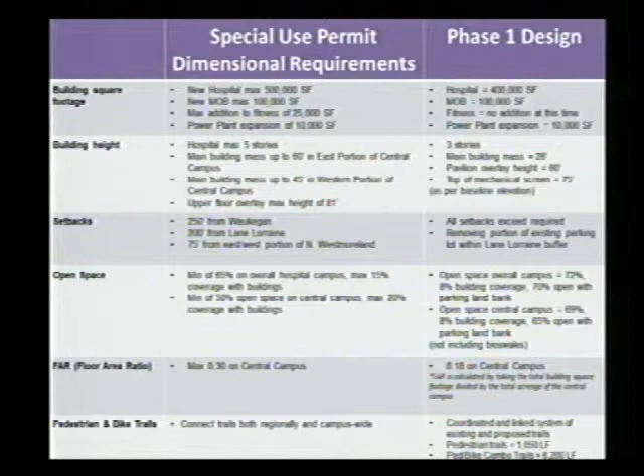Starting with the site plan, just to go through some of the basic elements once again: the building from the very beginning was meant to be a true marriage between the site and the program for Northwestern. In doing so, the building became a much lower scale, basically a 3-story building with mechanical penthouses, put into a crescent shape that engaged the necessary water elements and enhanced it by way of a reflecting pool, creating a real connective link between the south and north campuses. Parking is to the west of the structure, linked in an organic way, taking advantage of the topography, the existing roadway system, and the views to the water.

Coupled with that, we continue to respect the berms, the edge conditions of the site. We have berming along the south and the west. On the north side, there is a no-build zone of 75 feet from the southern edge of Westmoreland, as well as drumlins that occur on the west and south end of the site, which provide shielding for residents on the west and on Lane Lorraine to the south. There are also existing berms that will remain along the north side. So we're really cocooning the site to protect the neighborhoods and shield the view to the building, at least until you get into the interior portion of the site.

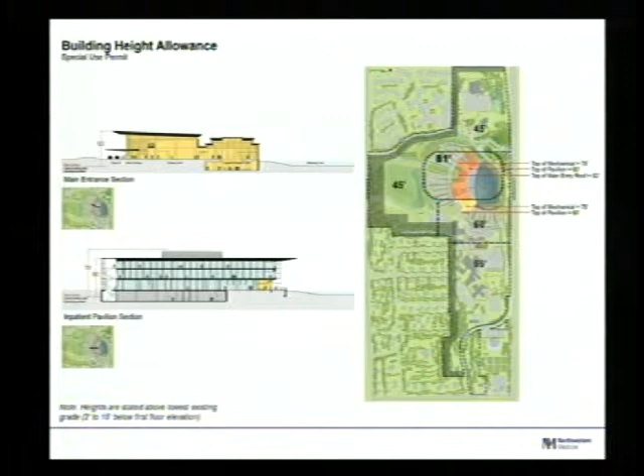As we've continued to detail the building and evolve it, we've continued to update our views of the building from various vantage points, from Green Bay, from Waukegan, and within the site. I'll show you how that has progressed as we've gotten greater detail.

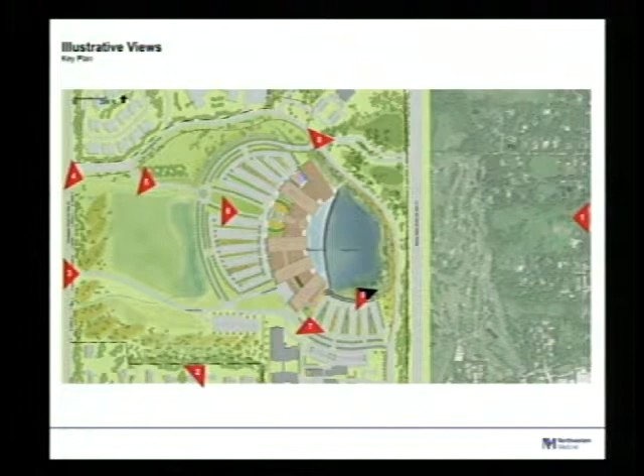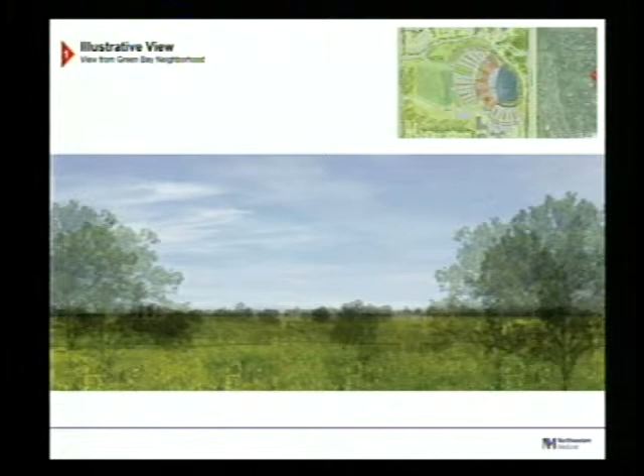This is the view from the Green Bay neighborhood. As before, it's still a very low building, and it'll be very hard to see from that kind of distance, even in the wintertime. Even from Lane Lorraine, also difficult to see. We purposely did not put trees in this image just so we could get a glimpse of the building, to show maybe a worst case scenario of what you would see from that vantage point.

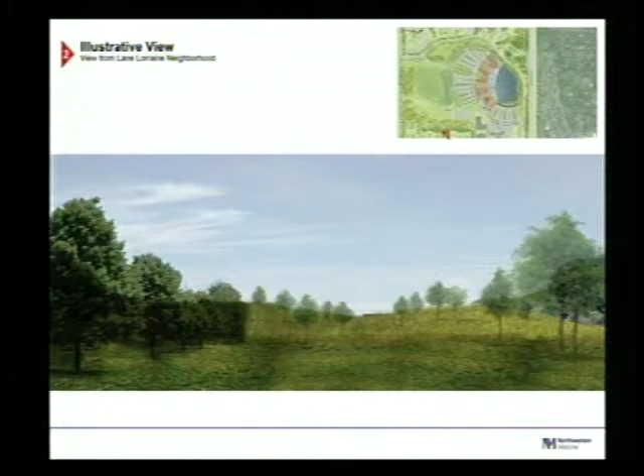And then as you get to the front door, the building opens up into a public front door that we see as a very inviting, warm, and nicely scaled entrance—not too large, not too small—with a drivable plaza, with all the access that one needs to get into the central part of the building.

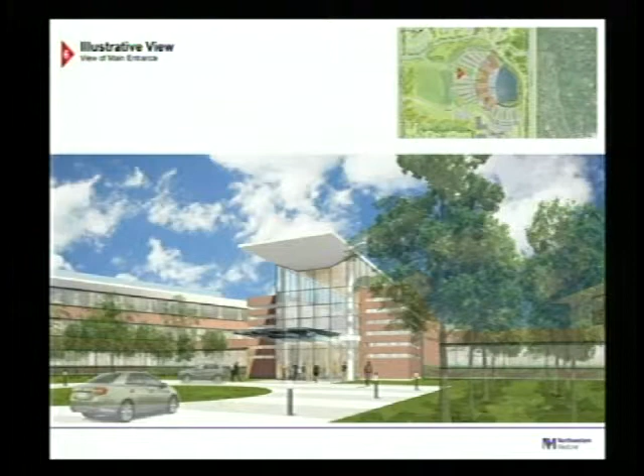Just to give you a sense of what all these volumes mean in terms of the experience inside of the building, that front door opens up into a lobby that runs from the entrance all the way to the lake, with views out both ends. So this idea of transparency is greatly enhanced through the building.

And from a wayfinding point of view, the building is made very superior by that, so that people under stress know exactly where they're going, and it's a very clear diagram.

And at the end of that lobby is this space we call the rotunda, which looks out onto the lake and will offer opportunities to get out onto the water, as well as look down into a food court at the lower level. And then the circulation space kind of springs from this rotunda, both north and south.

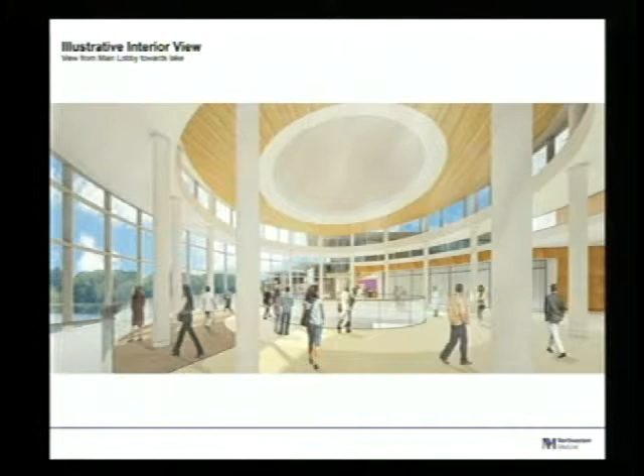Another major entrance will be the emergency entrance, and essentially this is a smaller version, if you will, scaled from the main entrance. This is one of the major apertures into the building. It too wants to be a clear, concise, and friendly opening into the building with some of the same sun shading and architectural detailing.

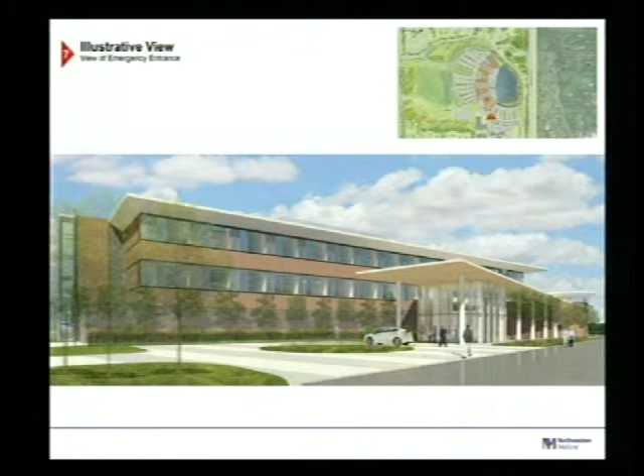When I was here last, there was a question about the northernmost pavilion, about its relationship to Westmoreland, and how it would transform as it went from first phase to future phases. In its first phase, it is a 1-story pavilion with all the same kind of architectural detailing as all the other pavilions, but as I said, 1-story tall. There's ample room between it and Westmoreland—I think there's a very comfortable relationship there.

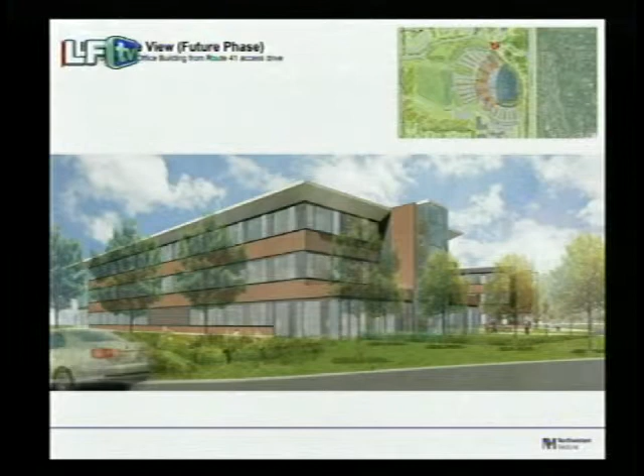And because the building articulation, which is very horizontal in its character, adding on vertically we think is a very easy thing to do, and actually came into our minds as we developed these buildings, knowing that we may have to develop them vertically over time. So as you move from phase 1 to future phases, this sort of stacking we believe works very, very well. And we can then ultimately fashion and craft this building to look like all the other pavilions in terms of scale and mass.

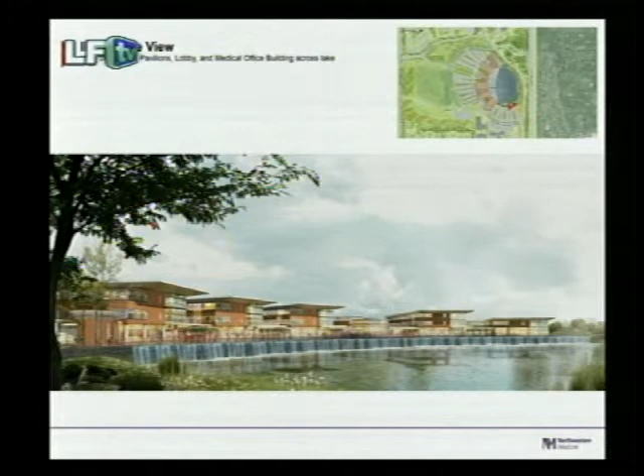And of course, on the water side, the lake side, that's remained pretty much the same, with a public concourse that runs on the first level across the entire length of the building on this side. There are some special spaces in the pavilions, which are special waiting rooms as part of the patient floors. And then the rotunda itself that you saw the interior of is actually right there, at the end of the lobby hall.

At nighttime, the side that has a bit more brightness is still dampened a bit by the overhangs, from a dark sky point of view. The real primary lighting is at the lowest level, at the lobby level that runs across, and probably at the rotunda.

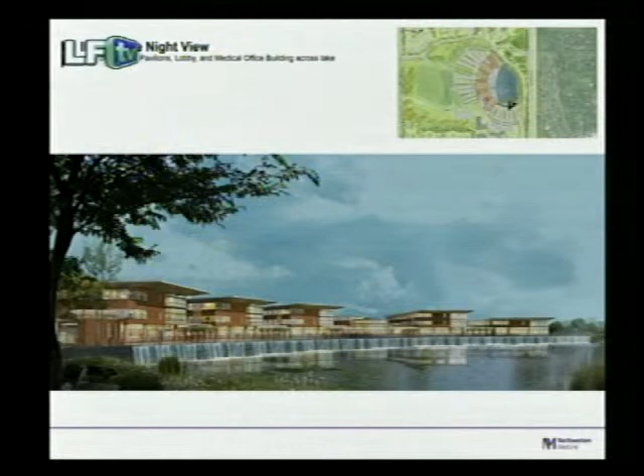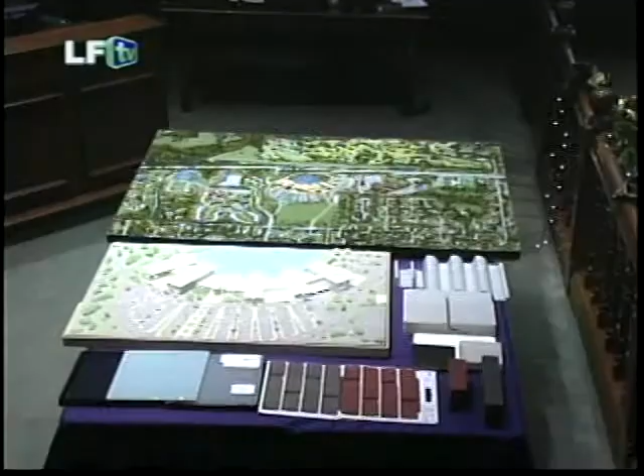We see the basic material of these buildings to be brick, and those two samples are on the table here. We are using two different bricks, but the primary brick is about the same reddish color as the existing building, a standard brick. We're using a slightly darker brick to give scale to the parts of the walls that don't have as many windows because of program requirements, to give them scale and character, and to highlight certain architectural elements within the building.

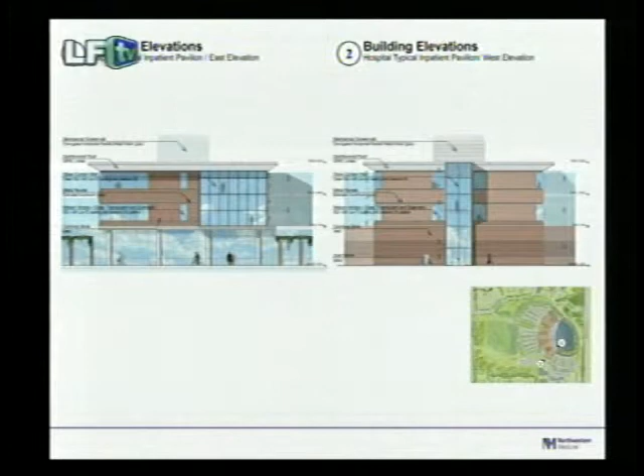On the long sides of the pavilions, we have taken great pains to create a choreography of window types and glass to deal with the program that comes up against the glass. We have bathrooms, for instance, that are part of the patient rooms that come up against the glass. We didn't want to see those be large blank areas, so we are offering translucent glass to bring light into those bathrooms, as well as a shadow box glass panel with ceramic frit. You'll see examples of those on the table as well, to create the pattern you see here.

As we move to the medical office building, not to make it a duplicate of the bed towers, but to keep it within the family of expression, we're using fritted glass and clear glass and a module of window paneling that starts to mimic what's happening in the patient pavilions.

Looking more carefully at the articulation on the facade of the building, we're looking to create reveals, insets of metal, articulation around window frames to give this wall a lot of texture and character, not just a flat wall, something that will cast shadows and be interesting to look at as you get closer to the building.

I should also mention the overhangs are made of GFRC, a fiberglass reinforced concrete product which is lightweight and moldable into about any shape you wish. That's the material of choice to create these shapes and all the turns and corners you see on the roof lines of the building.

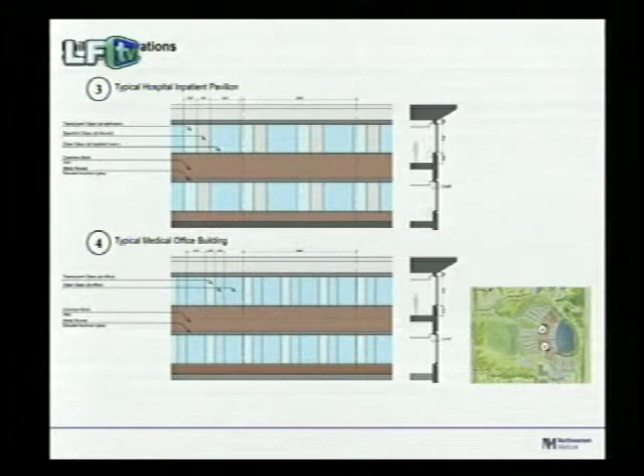Moving to the site lighting, there are really five fundamental components to the lighting scheme, and we see it as an overall much bigger improvement over the existing lighting today. Starting with the outer edge, we have the existing fixtures, and I will show you photographs of each one of these fixtures.

The outer ring is essentially the existing fixtures that the community knows very well, which are more decorative. As we move into the inner zones, such as the interior roadways, parking, common areas, and building entrances, the fixtures change to be more compatible with the new architecture, and to employ more efficient fixtures that will not glare as much, being very sensitive to the perception of light from all sides of the building.

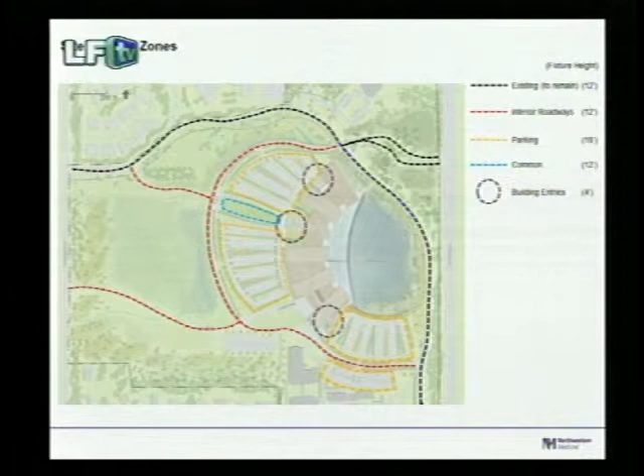Being more specific, here's the lineup of fixtures we see being used. These are the fixtures that are there today, and will remain around the perimeter, in an effort to mix the traditional fixtures of the past with the new fixtures of the new building.

In all cases, our goals are these: one, to complement the architecture. Two, to deal with the dark sky issue, to be as responsible to that as possible, cutting down on glare as much as possible. Limit the light pole height, which is very important. And certainly try to be energy efficient in all cases.

As you can see by this chart at the bottom, we believe all the fixtures, except for the traditional one, are meeting all of that criteria. The other takeaway is on the upper part of the panel: in general, as the fixtures get closer to the building, they become shorter. They also become closer together, and it gets a little bit brighter as we get closer to the building.

All of this is done for safety reasons, as well as choreographing the light so that we're not providing an eyesore to the surrounding neighborhoods. I should also add that all the fixtures, certainly the new ones, as you'll see in some of the diagrams I'm going to show you, have the actual light source embedded deep into the underside of the fixture. So you're not really going to be able to perceive the bulbs or hot spots unless you're literally near or underneath them.

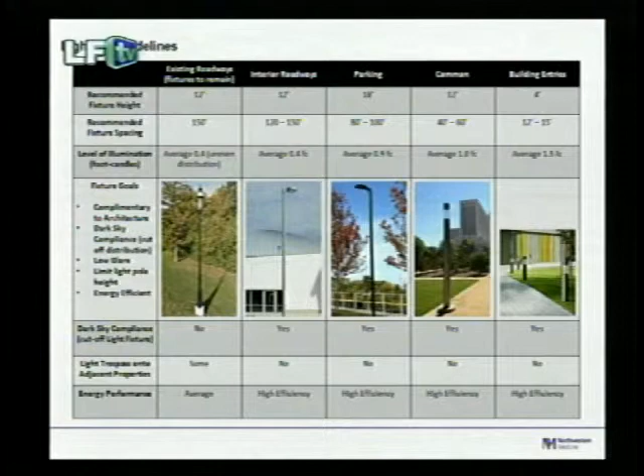Here's a good example of that. Here is the existing, more traditional fixture that is on Westmoreland now. As we get into the interior roadways, we're suggesting a fixture here about the same height as the existing one, but you can see the difference in the cutoff. That will greatly contribute to its more subtle impact on the environment, and the whole idea of perceived light within this environment.

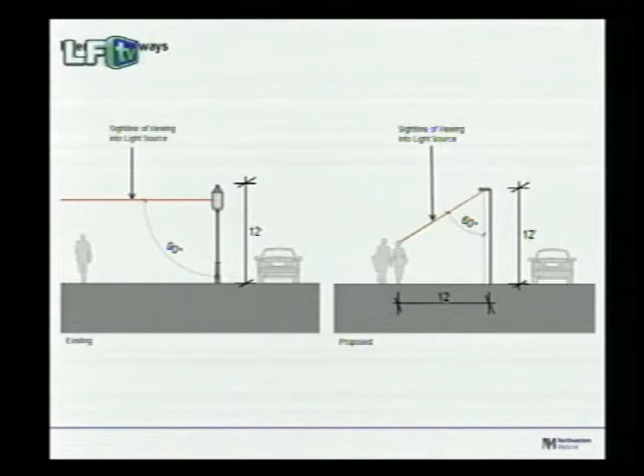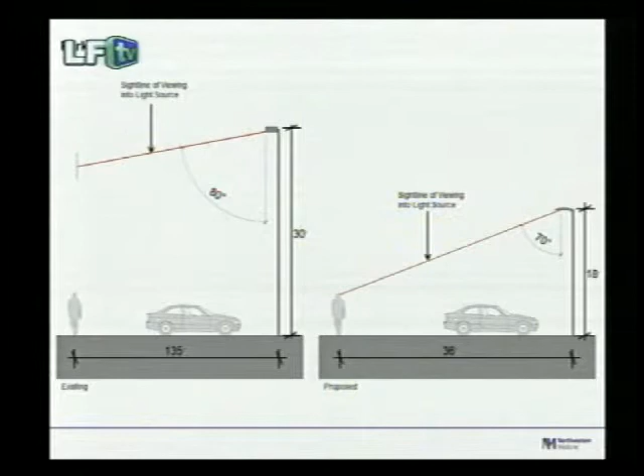As we move into the parking areas, right now there are a number of fixtures nearly 30 feet tall with a fairly wide cutoff. There's a lot of glare, and they're also very sporadic in terms of their light source. What we're seeking to do in the next generation is go to an 18-foot high pole with a greater cutoff, and also a fixture that will distribute the light more evenly across the parking lots. I'll show you an image of what that really means.

As we get a little bit closer to the front door, the commons area is that sort of formal processional roadway that takes you to the front door. Once again, the actual fixture is up in the housing, mostly lighting the ground with a fairly tight cutoff, creating this avenue of light as you get to the front door and leading you to it.

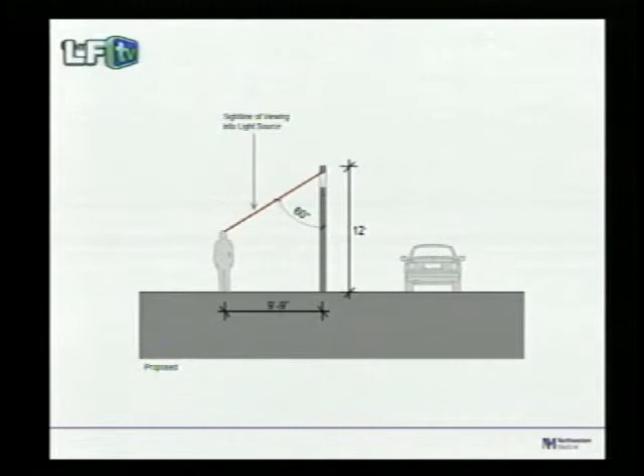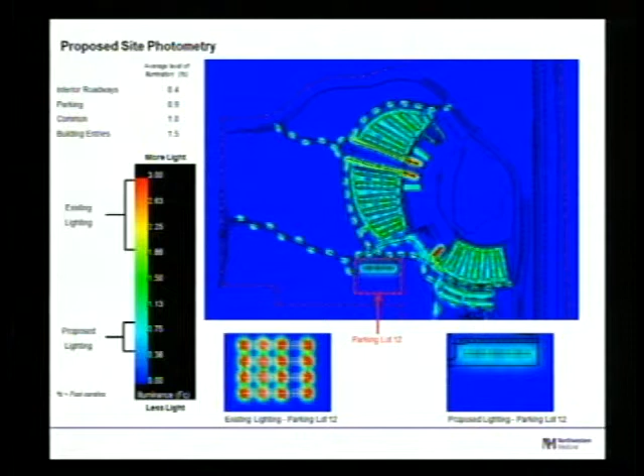By the way, this is that parking lot to the south next to Lloyd and Lorraine, which we are reducing in size to this size. And you can see just by looking very quickly, the idea is to distribute the light much more evenly and lower down, which at the end of the day gives us much better safety, much less glare, and much less light pollution to the surrounding areas.

And we're doing that all with less foot candles, less light overall, than the existing fixtures. So we're also being very efficient. Once again, the amount of light is being curtailed and really guided carefully for all its very specific uses.

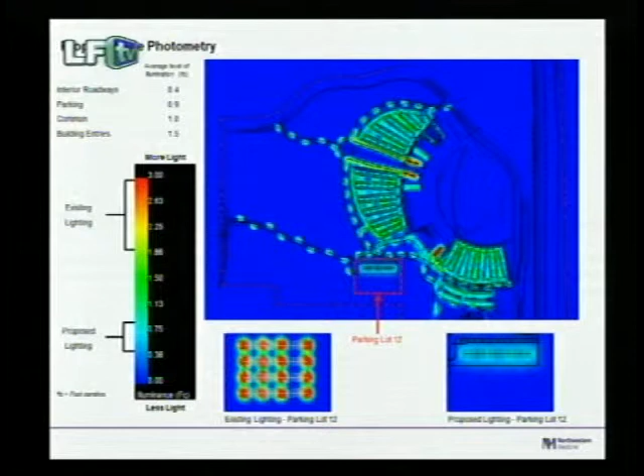It's a little hard to see with all the lights on in the room, but maybe you can see what I'm trying to tell you here, which is this is the existing lighting right now in lot 12. So we get these hot spots in really bright areas and then great areas of darkness. There's a lot of disparity.

Whereas what we're looking to achieve is more of this, which gives you greater continuity of light. It's obviously safer, more effective in terms of guiding people to their cars. At the same time, the fixtures are much more subtle in terms of their glare, and in our case will be much lower than the ones that exist today.

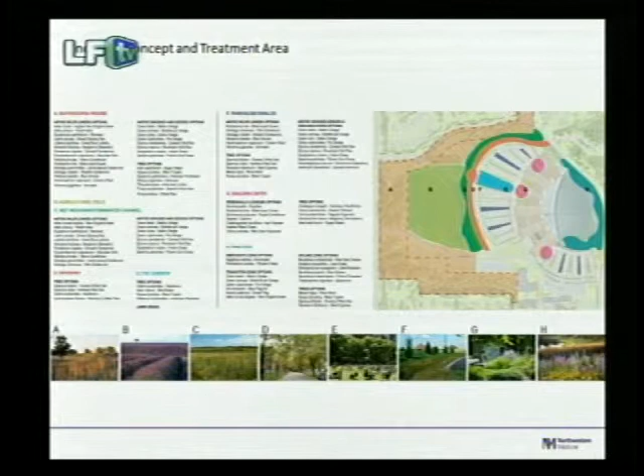So that leaves us the more detailed elements under development, which we will be coming back to you with at a later time. Namely, a more detailed planting plan for the landscape, using the concept that we've shown you in the last 2 meetings, as well as coming back and talking more specifically about the signage, the site signage, primarily the monument signs and the vehicular and pedestrian signs that will be part of the system for the hospital, and talking about materials, lighting, and those kind of details associated with all those locations.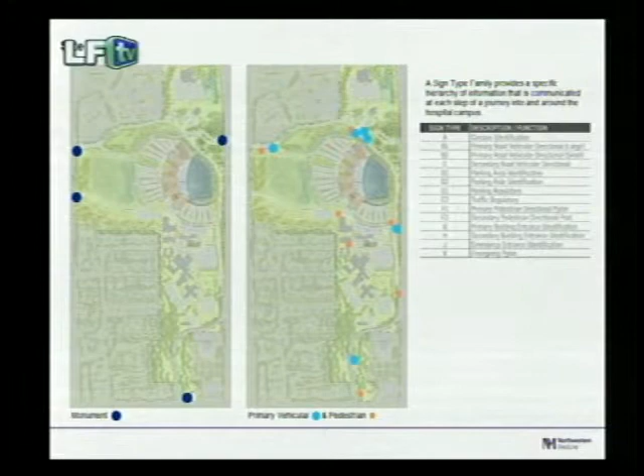And with that, I welcome questions and the next steps. Thank you, Mr. Shoemaker. I think before we do that, we'll turn to Kathy for staff comments on what we have before us.

Thank you, Chairman Lay, members of the commission. I wanted to start with just a few refresher comments on the process. I know the Plan Commission has heard this before, but I always think it's a good place to start to remember how much time the community, the Plan Commission, and the City Council have spent on this project to date.

This project first came before the Plan Commission in September 2011. That was an introduction of the master plan. Through a series of 5 meetings, the Plan Commission questioned, challenged, deliberated, listened to hours of public testimony, and in May of 2012, the Plan Commission forwarded a recommendation in support of the special use permit and the master plan to the City Council. The City Council, after a number of meetings and again deliberation, refinement, and working through the legal language of the special use permit, granted approval of the special use permit in October of 2012.

I have that date right, I lose track — October of 2012. As part of the Plan Commission's recommendation, as part of your discussion, you recognized that this is a very unique project for Lake Forest. The magnitude of the project is greater than anything Lake Forest has ever seen and will ever see. Certainly the complexity and the importance of this development to the community was something that the Plan Commission talked about for a while, and you ended up recommending that the City Council do something a little bit different, recognizing the importance of this project.

And the City Council endorsed your recommendation and directed the City Manager to appoint a Hospital Advisory Committee. That committee is made up of 9 individuals. Board Member Ziccarelli serves on that committee. That committee has been meeting with the hospital project team since January of this year, just about monthly with 1 or 2 exceptions.

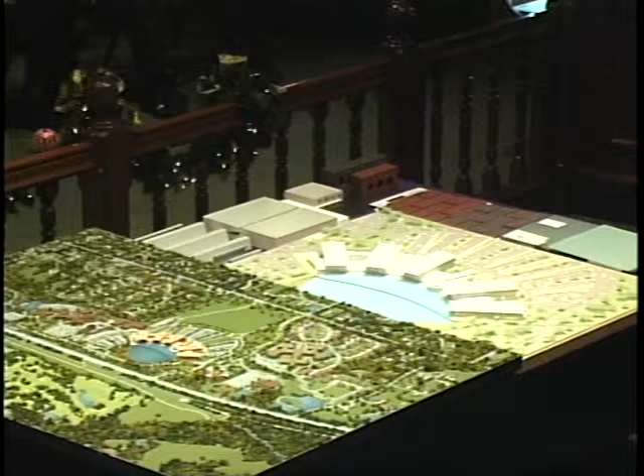You are looking at those plans, again, to assure compliance with the master plan and special use permit, both of which have already been adopted. We're not revisiting the master plan. You don't have any direction to do that, but are here really as a true-up to make sure that the plans that have come forward really are true to what was discussed.

I don't mean to speak for the advisory committee, but I think the report in your packet really emphasizes that the plan that came forward exceeds expectations in every way as far as where that master plan might end up as far as the final plan goes. The advisory committee's report pulled from the master plan and from the special use permit each condition, each requirement, and each specific direction, and walks through that in a very detailed fashion. So that has really made your work more of a checklist to go through and understand the advisory committee's decision on each item.

Importantly, the work on this project is not done. Certainly the advisory committee recognized that. At this point in the project, it is not unusual for us not to have a detailed landscape plan and not to have detailed signage plans.

Those will go back through the advisory committee in whatever time frame works for the hospital. It's not something that needs to be approved right now. Importantly, approval of the plans now before you allows the hospital to move forward on various fronts.

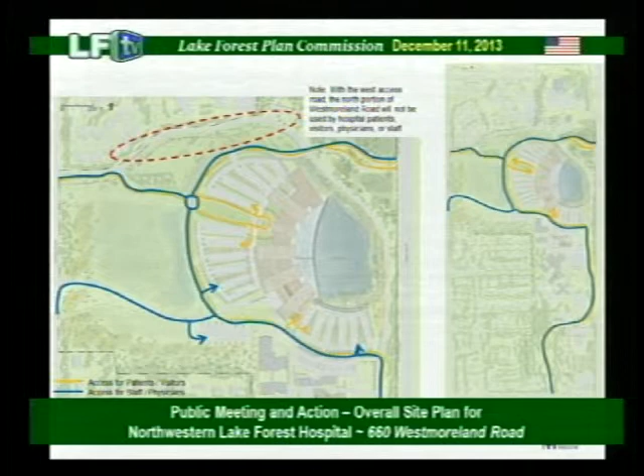Out of sight, out of mind for the future. There'll also be signage that will probably reinforce it. So that's another factor too.

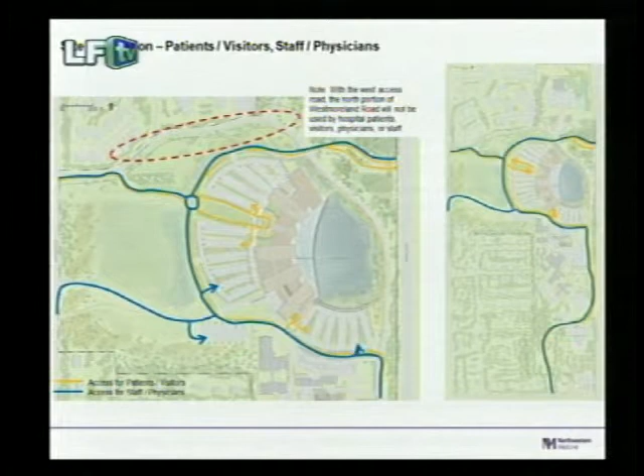I had another question, which I saw in the staff report and the advisory committee's findings - Kathy, this might be partially for you, and maybe Augie. Is it the intent - because there's quite a bit of architectural information tonight we hadn't seen before, and I see some material samples too, I wondered if we'd have those - but for such an important structure, looking beyond just the 25 years an engineer would design to, over a much longer period of time...

We're so used to our old hospital where, if copper turns green, that's fine. Is there going to be some activity before the permit set hits the table - not that I question your abilities - to have time for discussion about materiality, its durability, and things of that nature? Is that planned to possibly be part of the process going forward?

Go ahead. Yes? Okay. The intention is for the advisory committee to continue work on a number of different areas - landscaping, architecture, et cetera.

Maybe, if I understand right, not as a full 9-member group, but as we go forward and things become more specialized, some members of the advisory committee would stay engaged with the design team through to the point where drawings are ready for permit, or far enough along to be detailed out. So my understanding, Kathy correct me if wrong, is the advisory committee will stay intact to some degree to handle those specialized areas. That's a recommendation from the advisory committee - not unlike, even for smaller projects, Commissioner Berg, where the Building Review Board or Historic Preservation Commission would appoint a 2-member subcommittee to meet with staff and have those discussions.

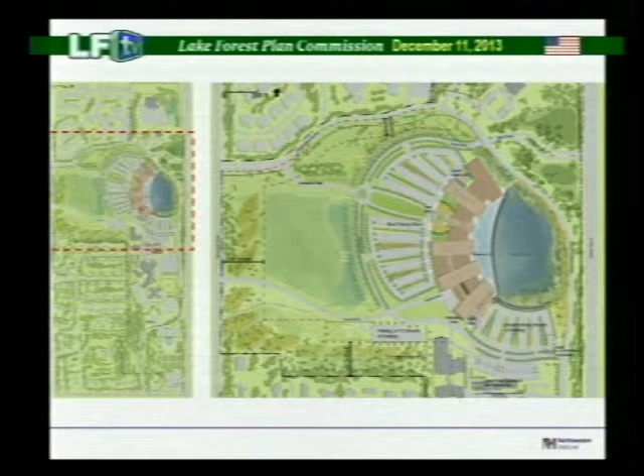So if you could tell me again, what structures you're thinking? Go to what was page 8 of our handout, the one with the zone heights on it. Oh, that's the one we were just at. Yeah, okay.

And the question once again is, are those structures at all affected? They are not, okay. No, we're not touching those. Okay, thank you. The other questions I had have been asked and answered. Very good.

Okay, further questions? Guy, did you have one or two more? Actually, there's one thing I wanted to add about the lighting, and it's nothing that you've really presented. It's just an observation, because I travel this road a lot going to the Fitness Institute. Coming south on the road, as it serpentines along the highway, there's a couple of places in the evening and when it's dark out that are really hard to see which way the road goes.

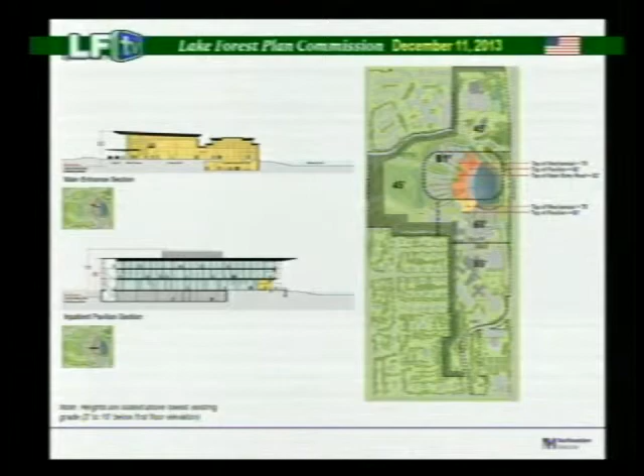And with that many wiggles in it, it's hard to even memorize that road. I can't imagine that when there's snow cover, it's really hard to pick the curve up without snow, let alone with snow. And I'm wondering if that could be somehow addressed. It's close enough to where your building will be.

It's just south of it. That's really kind of, and just since the new repaving, I just think it may need to be revisited. It's not very safe, and the road is only traveled as much as it is now. I'm not sure if it's a lighting issue. It's just really hard to see and to anticipate the curvatures.

Okay. It is now time to move to public comment. But before we do that, I would like to do something that I should have done before we started hearing this, and that is, do any members of the commission have any ex parte contacts or conflicts of interest on this matter? Okay, seeing none, we'll begin public testimony.

We have a lot of people here this evening. I assume some or many of you would like to testify or give comments on what is before us. Can I just see a quick show of hands of those who may wish to appear? Okay, good. Our procedure is 5 minutes, and please, whoever would like to be first, please come on up. And please provide us with your name and address before you address us. Thank you.

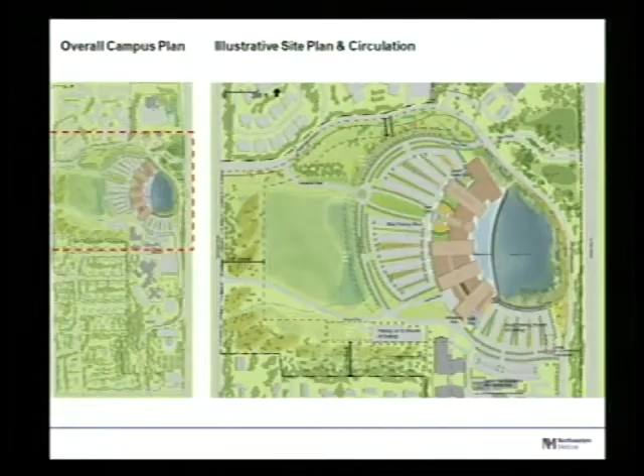May I ask a question? Sure, go ahead. Mr. Schumacher, what is the current height of the berms there, roughly? North side or south side? South side. 10 to 15 feet.

And when you say enhance, what do you mean by enhancements? Reshaping them and making sure they do the best job possible. But you're not going to increase the height? That's not the plan as far as I know. You might, there's the possibility, but no exact plans at the moment.

All right, and could somebody refresh me, maybe Augie, what is the berming like on the north side of Westmoreland? The north side, I believe, is about 8 feet, but it has a lot of plantings on it, including pine. Go ahead, Mark. I'm sorry, Augie, that's the cross-section through there that exists today, right? Am I mistaken?

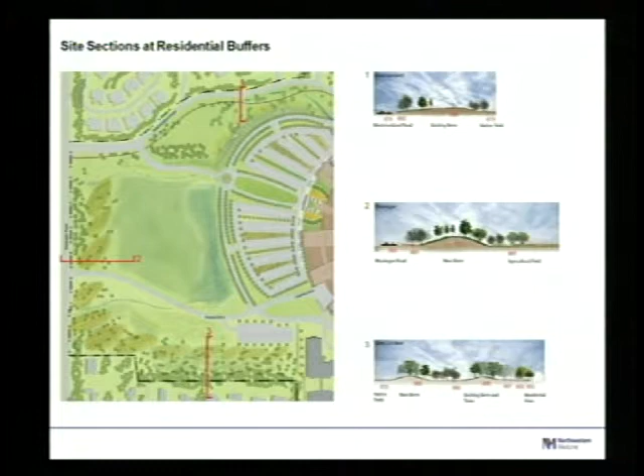Did you show a slide that pictured the intersection of the connector with Westmoreland? Yes, there it is. You went by it. There it is, you're talking about the actual photograph, yes. So that post you see there with the flag on it, that's the center of the roadway as it meets Westmoreland, the connector road. So you're looking at the berm currently on the north side of Westmoreland, plus the tree cover.

Are most of those, if not all, evergreen trees? Many of them are, but not all. I can't say all, but certainly a lot of them in the foreground are evergreen. And you can see that the berm here is more a 6.8 foot berm from the curb, so you've got a berm plus the planting on that north side.

Is there, Augie or Mr. Schumacher, an opportunity to enhance the evergreen screening on the north side? I mean, we're not touching it. It's not even your property, is it, Tom? It's not even on our property.

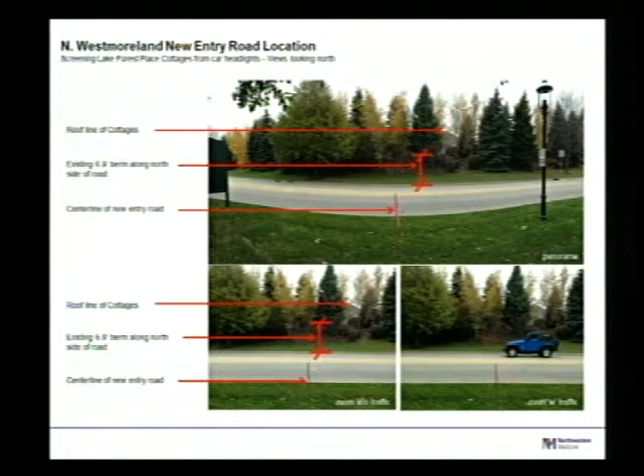Commissioner, I get that, I could certainly offer that. I think as this road takes shape, it's something we would certainly look at. And if, due to the alignment of the road, there's a gap on that berm somewhere, we would work with the hospital to do an infill planting with the approval of Presbyterian Homes. That's where I was going. Okay, very good.

So we've had, Kathy, did you want to say anything more as far as staff? Okay, very good.

Petitioner, would you like to make any further rebuttal or comments on what you've heard?

Mr. Chairman, no, I really would just like to reinforce that we believe we have a spectacular plan, and we recognize the comments. In fact, I know many of the people in the room, we've worked collaboratively in advancing this plan, and I think we can't lose vision of—it's certainly been focused this evening on the hospital, but it's what happens inside this institution that impacts everyone's lives.

Internally, I think it has to be recognized that we've been here for 115 years, serving the community. And this beautiful facility, at a time when, quite frankly, healthcare reform is going to change the face of hospitals across the country, and many hospitals may not exist.